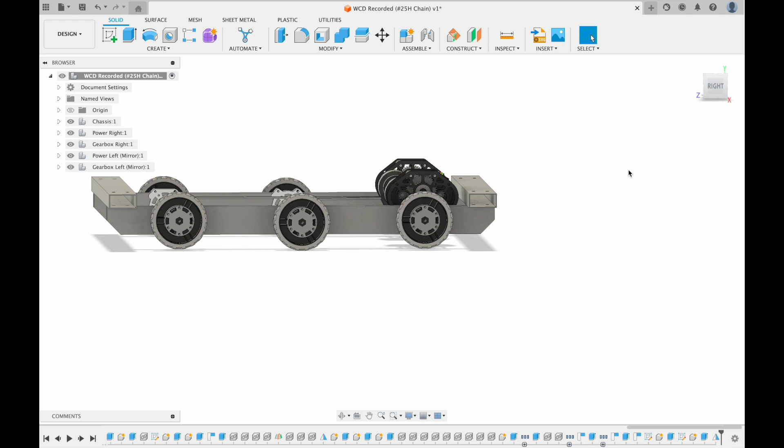I'm going to start by creating a component called bumpers, and I'm going to use the sweep tool for this. To do that, you first need to create a profile.

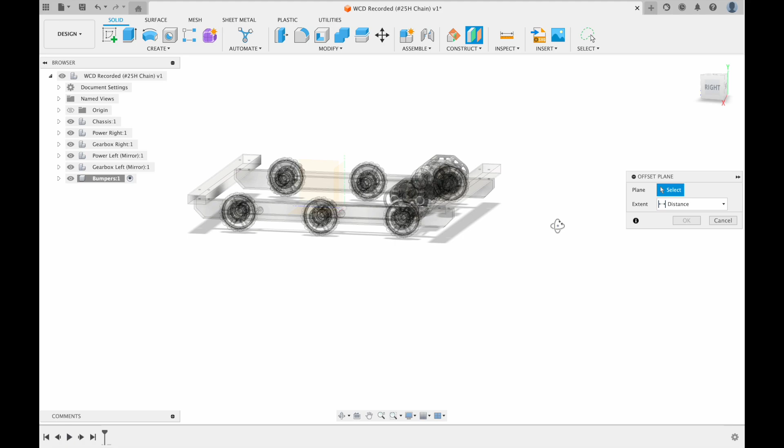I'm going to create an offset plane from here, offset it 6 inches, and then create a sketch on this plane. A bumper is created using 2 pool noodles, then covered with fabric and supported with wood. I'm going to do that in the sketch.

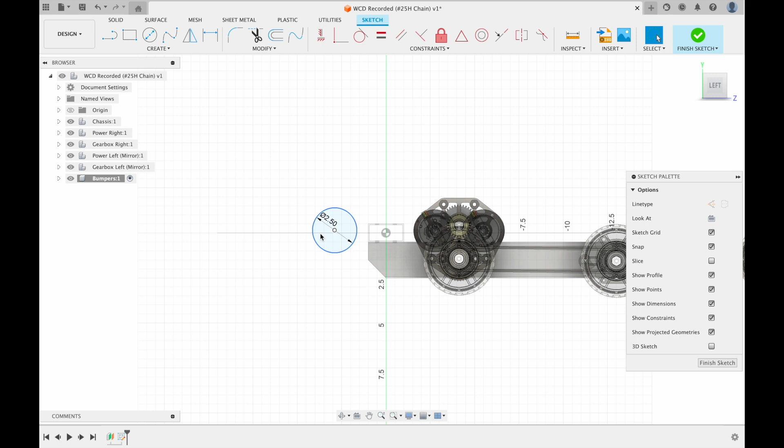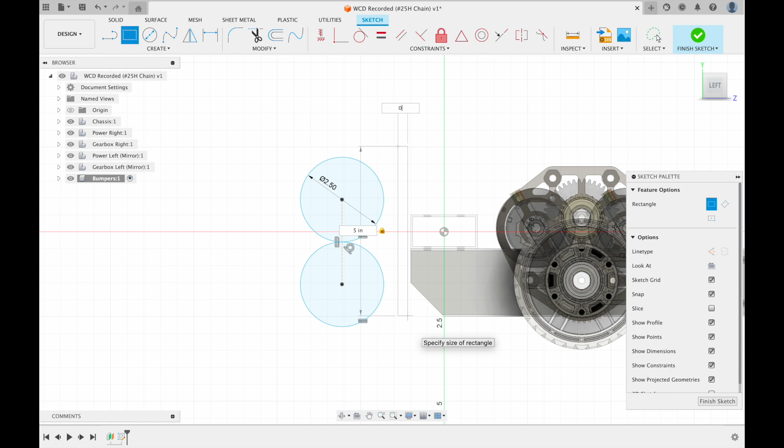So apparently a pool noodle is 2.5 inches in diameter, and it's made up of 2 of them. These are tangent to each other. The wood backing it is usually 5 inches, and then 0.75 in width.

I'm going to co-linear that, and then drop this an inch. I think that's too much, let's go 0.5. And then I'm going to make a line that runs here, and another one down here. Make it tangent, make this tangent.

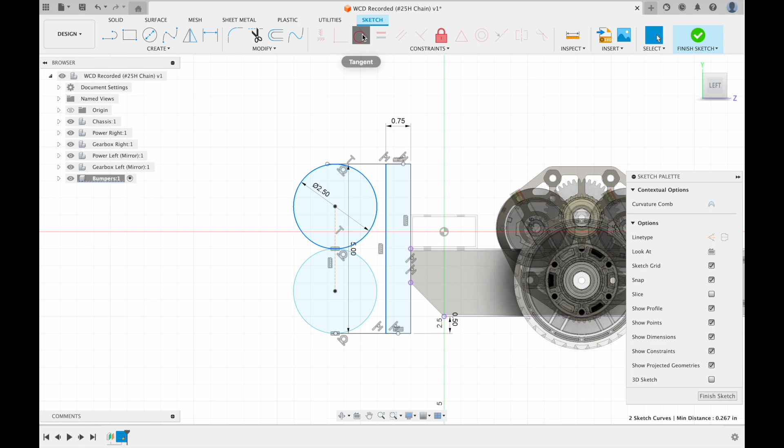And then this collinear and this collinear, and then these tangent. And then I'm going to trim this and add one final line going from here to here. That's going to be the bumper profile.

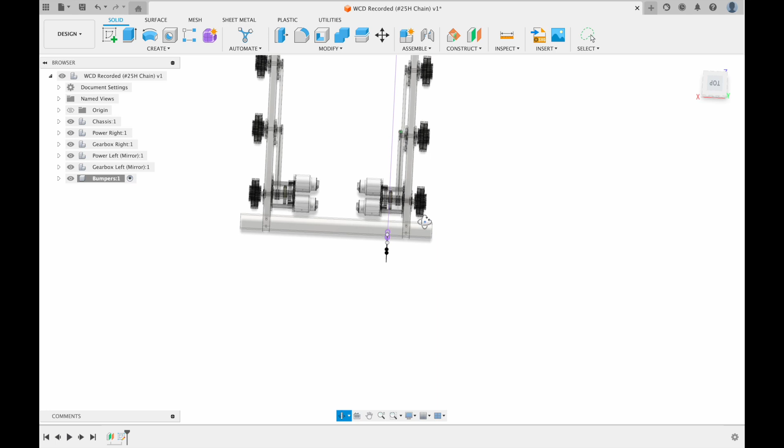And then we need to make the actual path that it will follow. You can see it follows a path, and it needs to be either the rails or the center line. So I'm going to have it go over here, which means I need to create a plane again, this time offset by 4.5 inches.

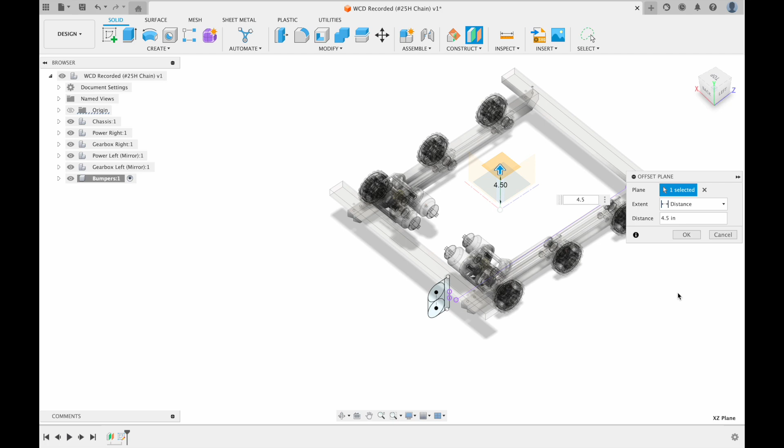Create a sketch on that plane, and then I need to project this.

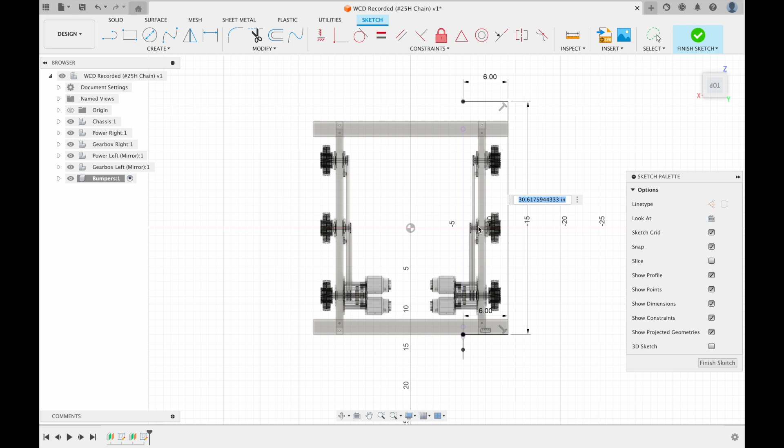And then I'm going to use the sweep tool, select only this part.

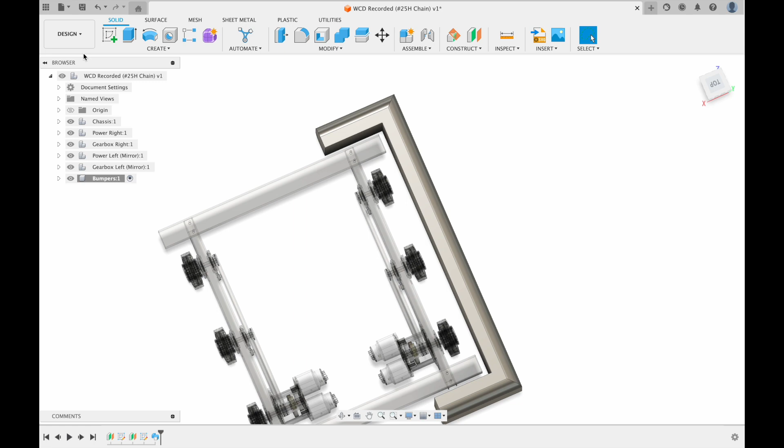And then I'm going to create another sketch over here. I'm going to project these lines, and then create the wood parts.

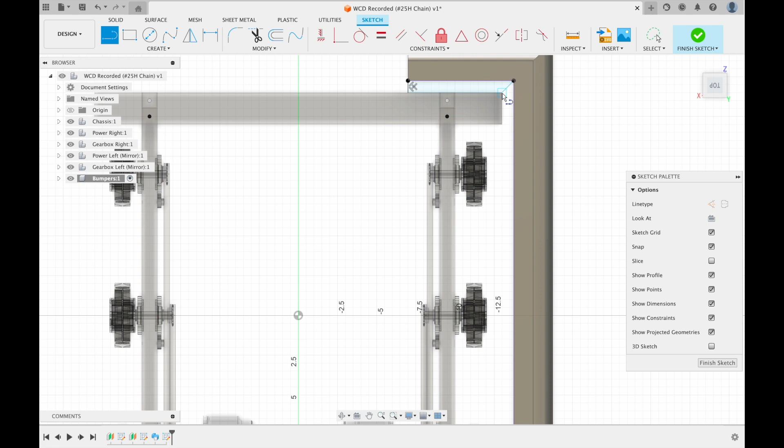Then I'm going to extrude individually.

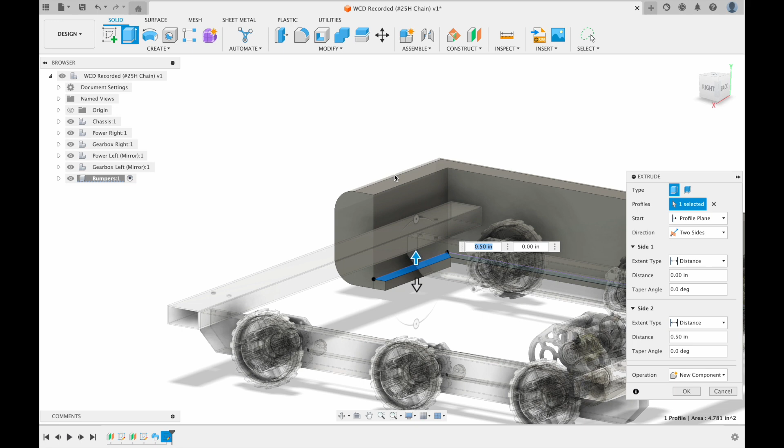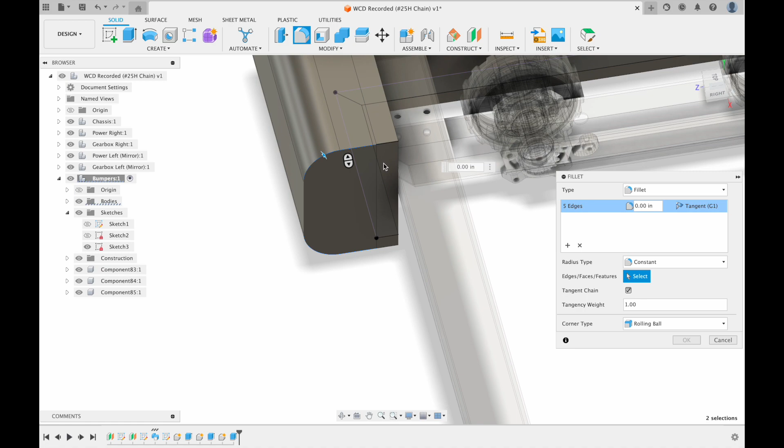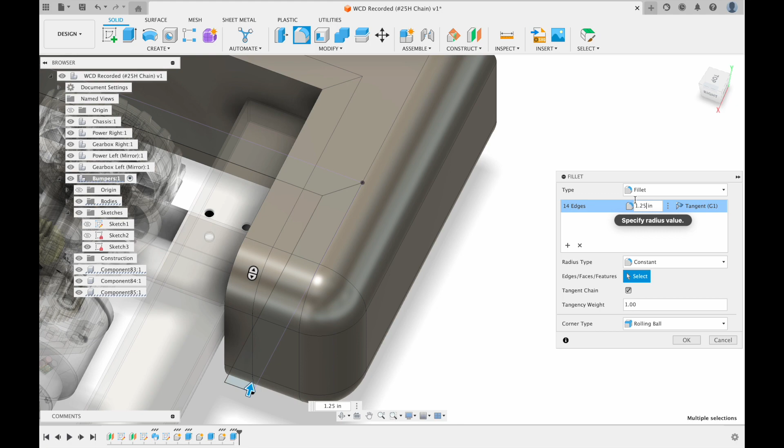Then I need to fillet these, and then fillet these. Then I'm going to put an appearance on them to make it easier to differentiate.

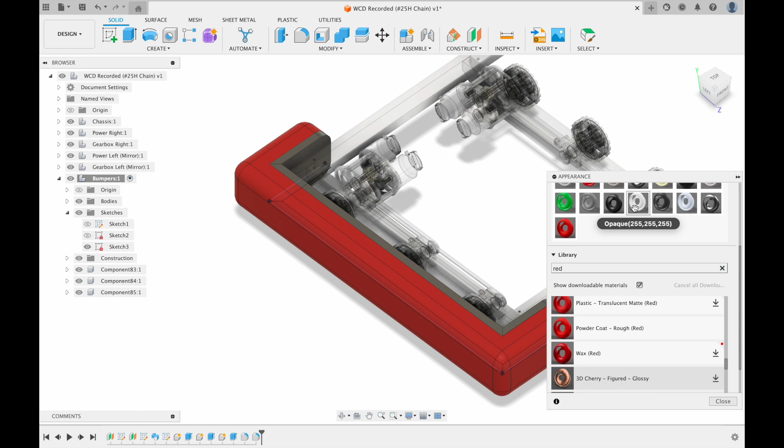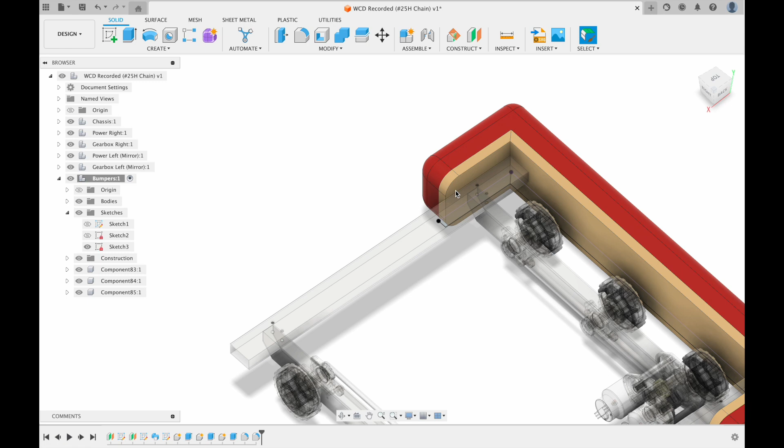So even though we have the bumpers CADed, there's no support for them. Right now they're literally just floating in midair. So I'm going to add a piece of stock going across here and then add some holes for the riv nuts.

So I mentioned that there are a couple of different ways that you can create stock. I think it was in the first video, the chassis. I'm going to show you another way to do it. It's just going to be one by one.

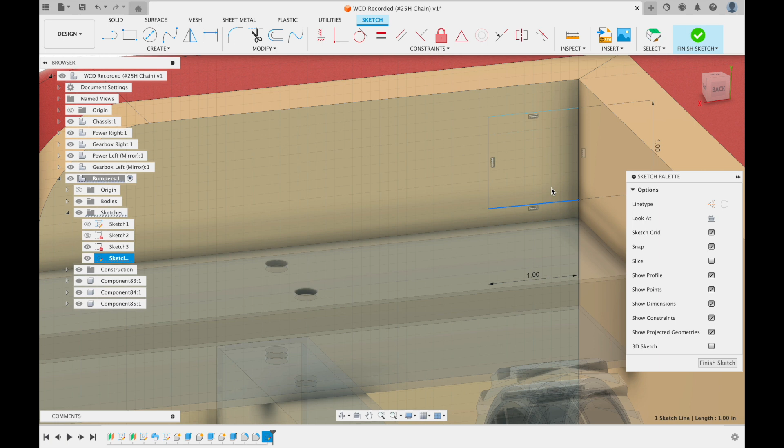And then I'm going to offset 1.5 millimeters inwards, and then extrude this across. I'm just going to take a second to name everything here.

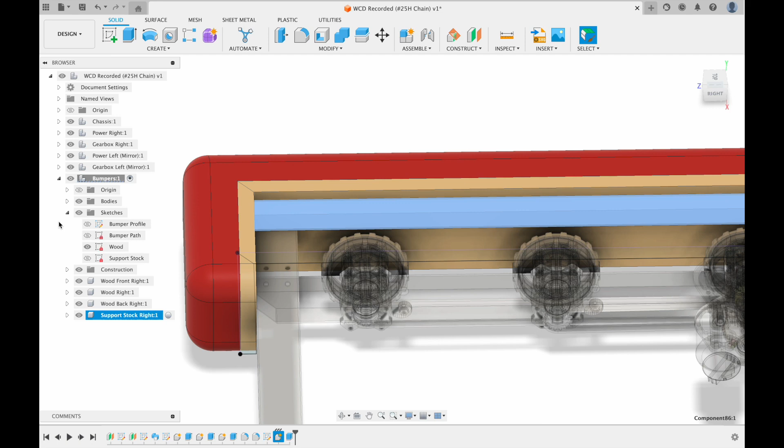Then I'm just going to hide the bumpers and the wood just to make things easier to work with. I don't need this sketch either.

Okay, so you shouldn't do this, but I'm just going to do it right now. You generally shouldn't do it, but I'm just going to make this.

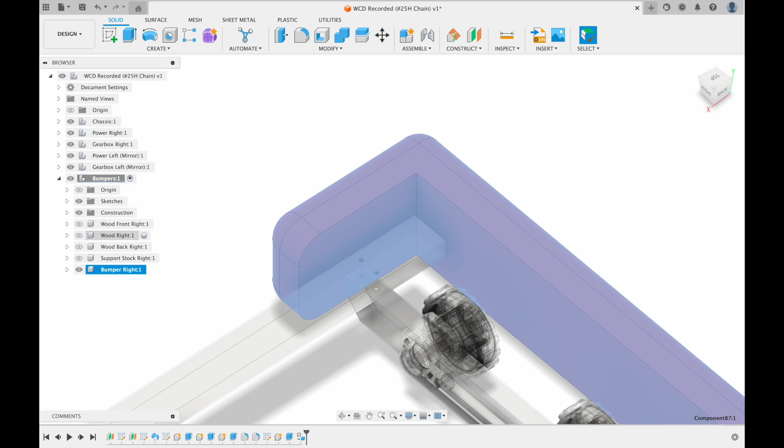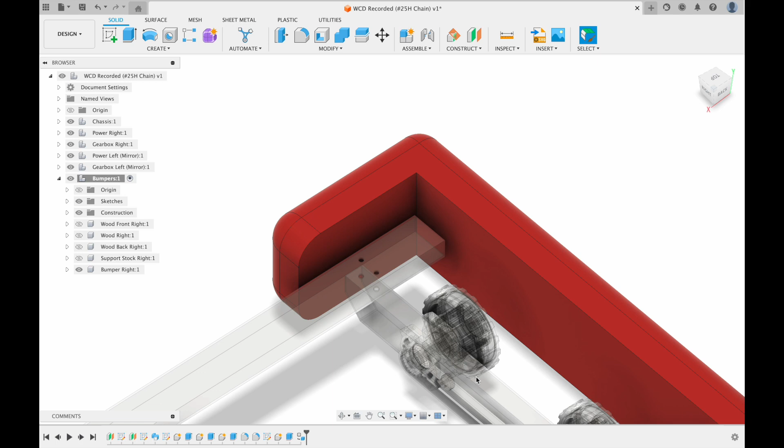So I accidentally forgot when I was extruding to make it a component, not a body. You're generally not recommended to do this, but if you do, you can just convert it from a body to a component. The only reason I did that was because a lot of my other sketches were based off of that, and it would have caused a huge issue with the timeline, with a bunch of yellows and reds. But usually you should just delete and make it a component if you can.

So I'm going to chamfer this.

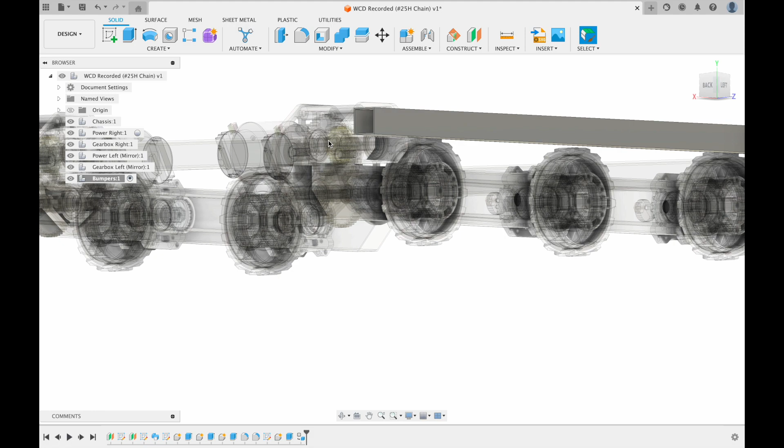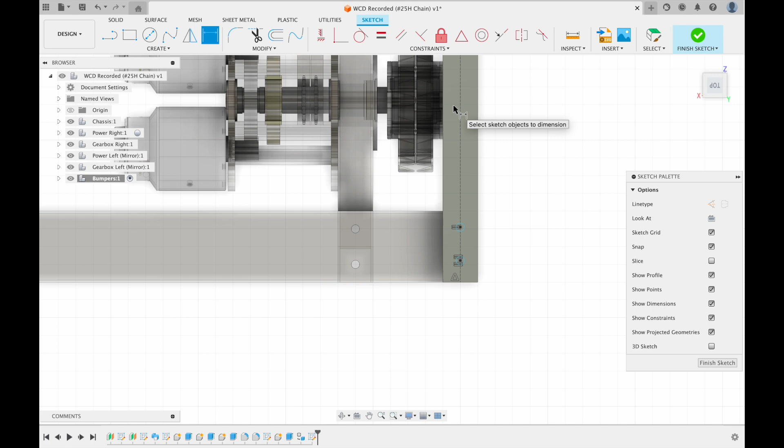And then create a sketch on this face. Create a midline going down, and then create 4 holes. I'm going to extrude these holes.

So next I'm going to show this, and then...

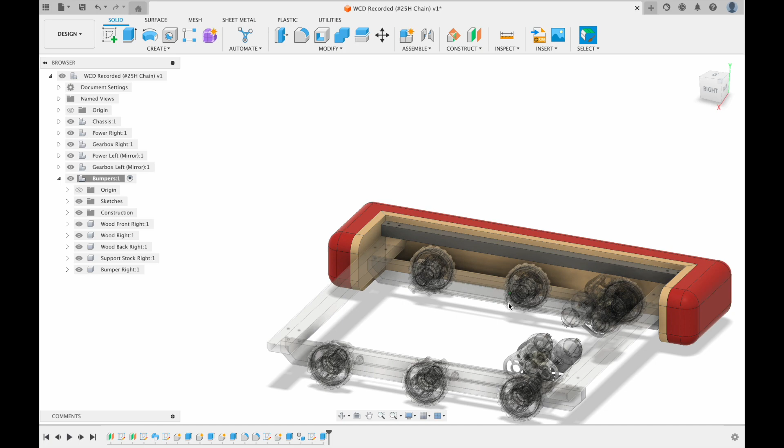I need to create mounting holes for the bumper itself, and to do that I'm going to use riv nuts, which are 10 millimeters in diameter. So I'm going to create a sketch on this face.

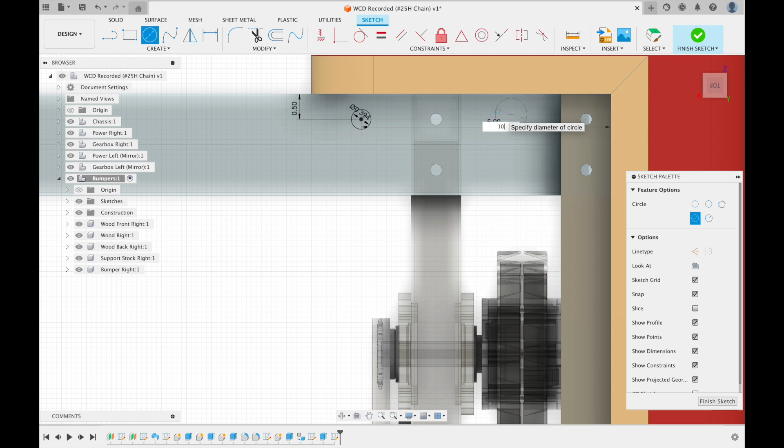And then I could just use an L bracket, and then I could just mirror this over, so I can create a line in construction.

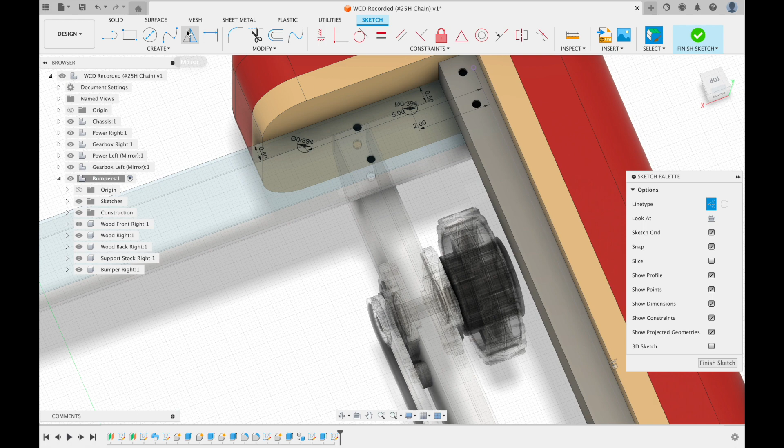And then I need to create probably 2 to go on the stock as well, but I can do that on the previous sketch. So I'm going to finish the sketch and go back here.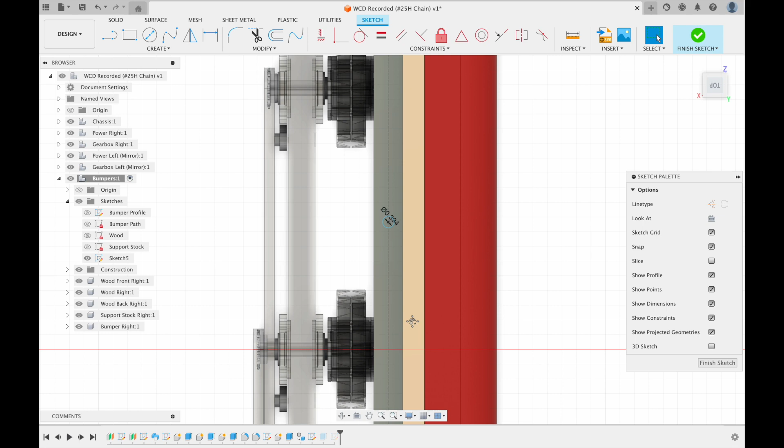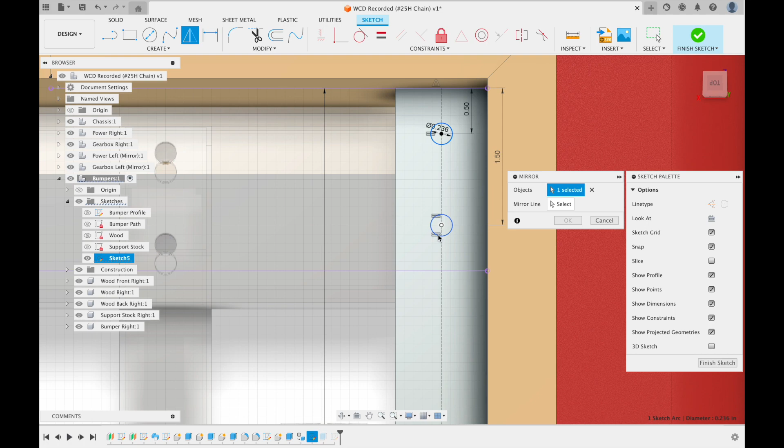And then I'm going to mirror all of this over. Or actually, I'm just going to mirror these 2 over this line so that I can then extrude those 4 holes into the stock over here.

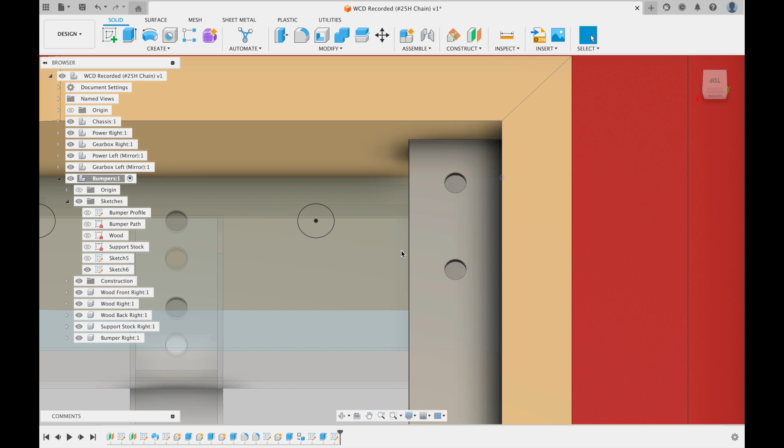And then label this. I need to extrude these holes, but first I'm going to mirror this over this line.

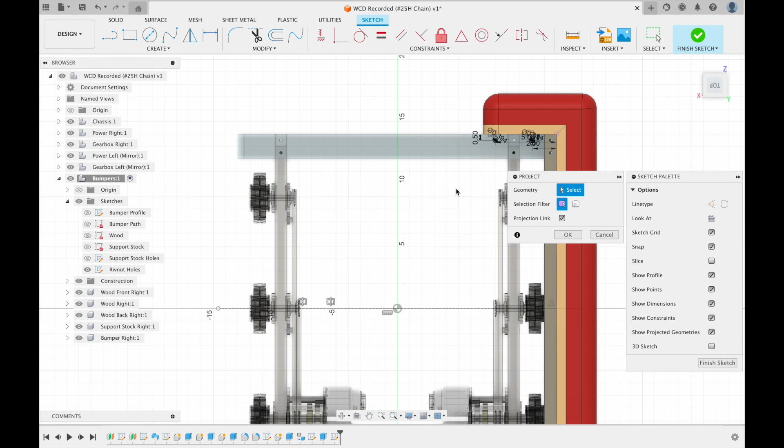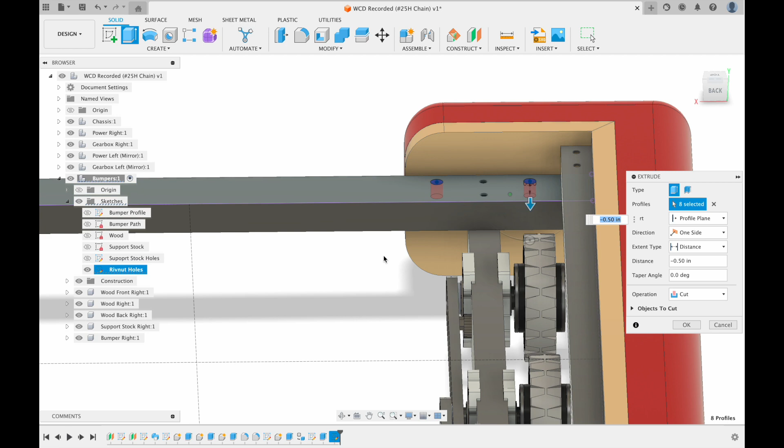So this only needs to go through one face of the stock because the riv nut doesn't need the other hole since we're using a riv nut. And then I'm going to go back and extrude the rivnut holes through these 2.

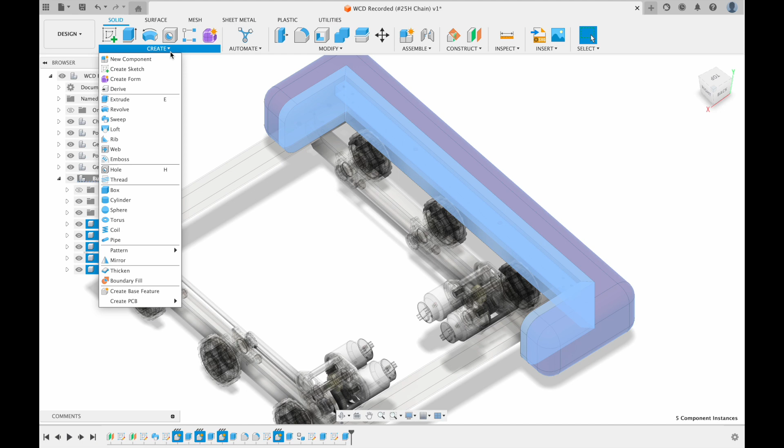And then we're done. So I'm just going to mirror this over this, and then change the name.

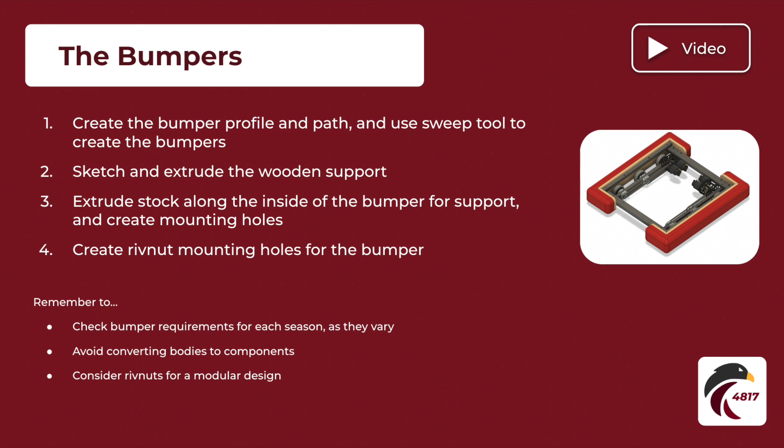And this is the Drivebase so far. As usual, a consolidated version of all of this can be found in the slide deck, and the only thing left now is the e-board.